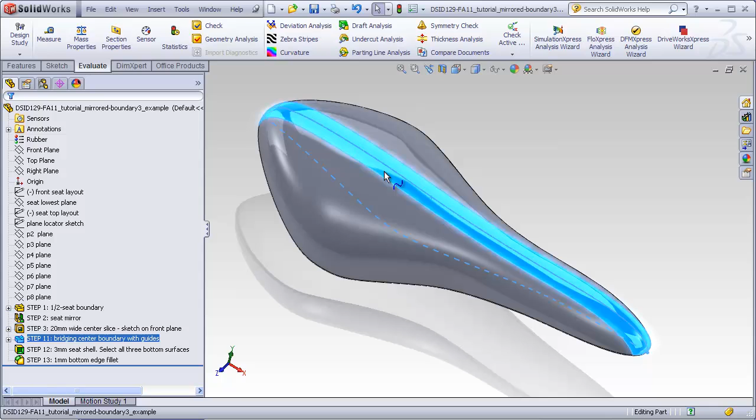In previous videos we learned how to make a symmetrical bicycle seat by making one half, mirroring it to the other side, cutting a slot out of the middle, and then making a boundary which bridges smoothly between the two. At this point it's probably occurred to you that this is a lot of work and that maybe the right solution is not to build one half of the seat when making the boundary, but make both halves of the seat at the same time.

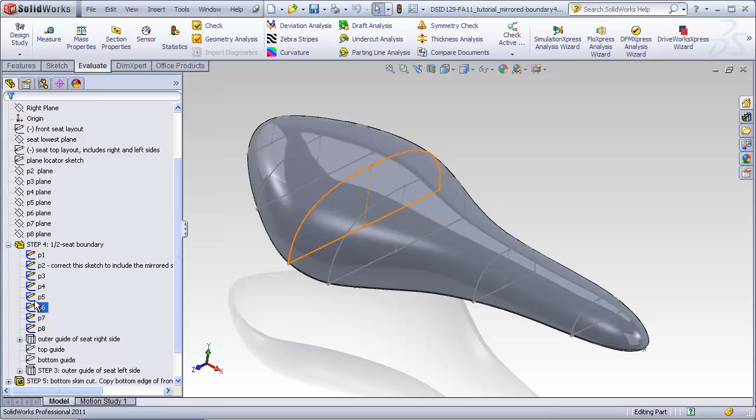So instead of having profile sketches that end right on the front plane and then are mirrored over after making the boundary, just have the profile sketches include both halves of the seat. And in fact we can do that, as you see here, and each profile includes both the left and right half of the seat, and this produces a nice seamless looking construction which is completely symmetrical and satisfies all of our needs. So why not just do it this way?

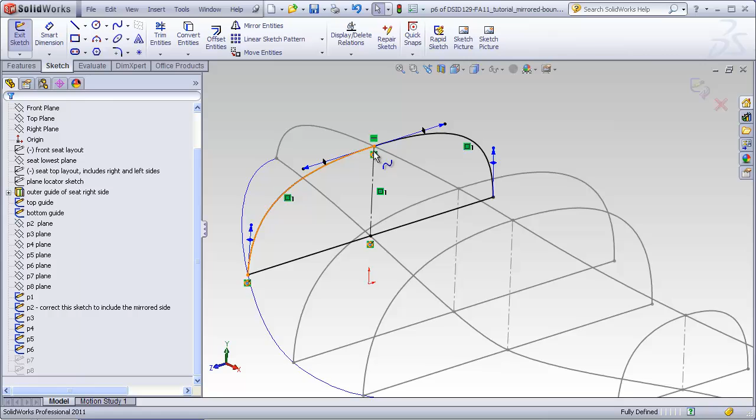So let's take a look at the starter file you've been given. Before you were given only one half of the profile in each sketch. Now you've been given both halves mirrored over on the front plane. And as always, whenever you're going to make something mirrored, you always have to make sure that any curves that meet the mirror plane do so at a perpendicular direction to the mirror plane. So here we see horizontal handles making them perpendicular to the vertical mirror plane.

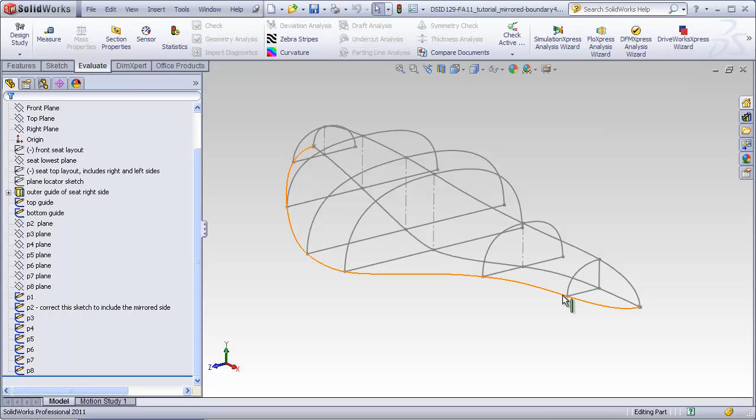Before you get started, one profile has intentionally been left as a half profile, so it will be your job to correct this to mirror over the other side, and I'll show you how to do that now. I'll edit this profile. All we have to do is take this vertical line, which is a solid line, change it to a construction line. Now just select all of our lines, mirror the entities, and that's going to mirror these lines about this construction line. That will complete that particular task.

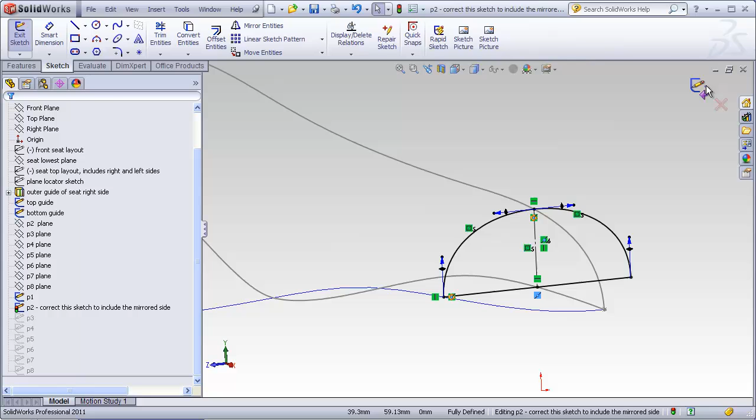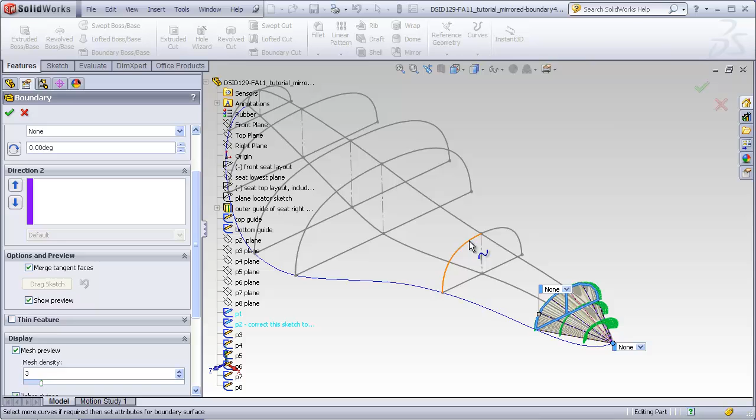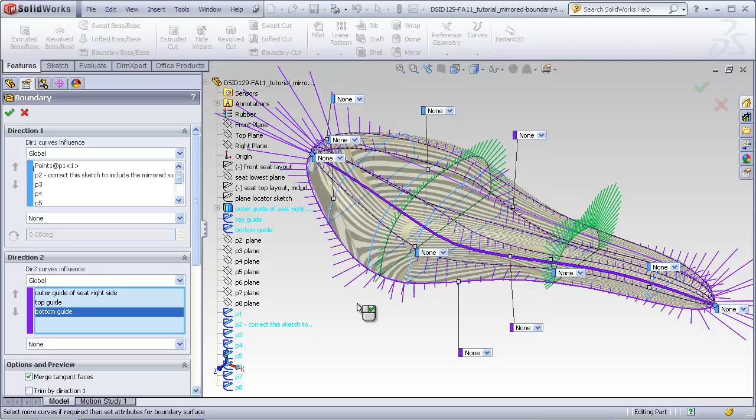Now we're ready to go ahead and make our boundary going from tail to tip, including both halves at the same time. So selecting the first section, P1, 2, 3, 4, 5, 6, 7, complete with P8. This was added into our direction 1, and then for direction 2 we'll include our outer guide curve, top guide, which has already been provided for you in the starter, and the bottom guide, which was also provided for you.

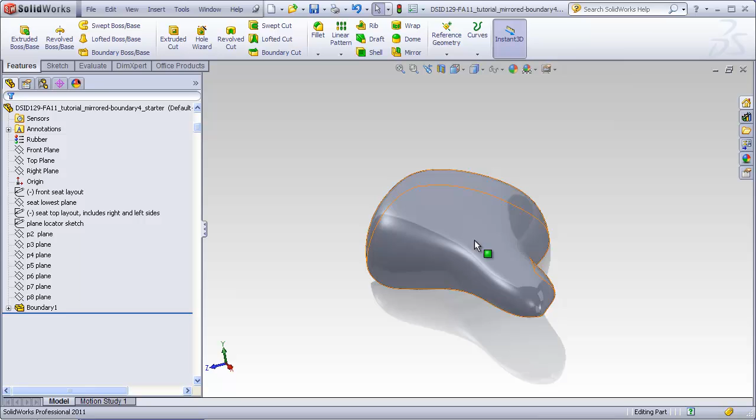Here's our completed seat. But we look at it from the top and we see that this half is not perfectly symmetrical with this half. Even though our profiles are symmetrical, we have nothing guiding this outer edge to manage the transition from one profile to the next on the left side of our seat. This of course suggests that what we need to have is another guide curve running on this side of the seat, which is a mirror image of our original guide curve.

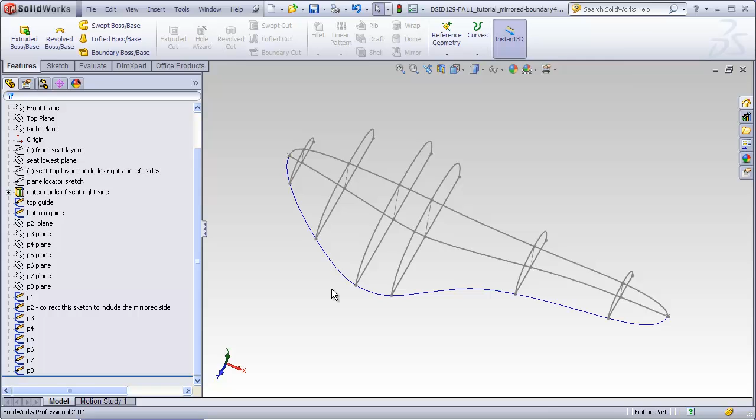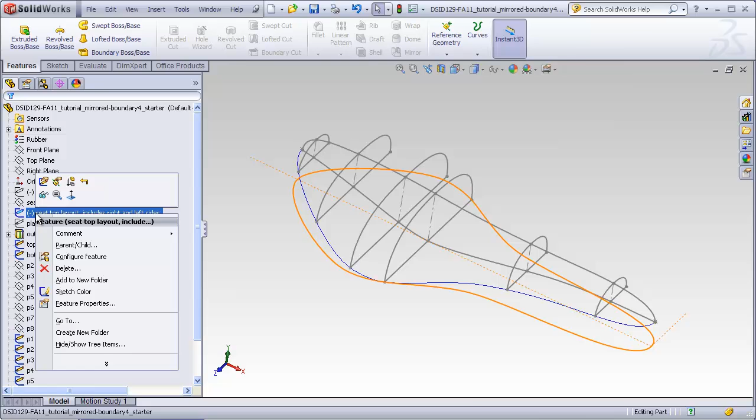The only problem is that this guide curve is a projected curve, and there's no way to make mirror images of projected curves. Instead, what we have to do is remake a new projected curve for this side using mirror images of the original sketches that were made to make this guide curve. The easiest way to do this is to go back to our top layout sketch and take this original curve and mirror it over to this side of the seat. This has already been done for you in the starter file. Now what we can do is use this curve when we make a new guide curve.

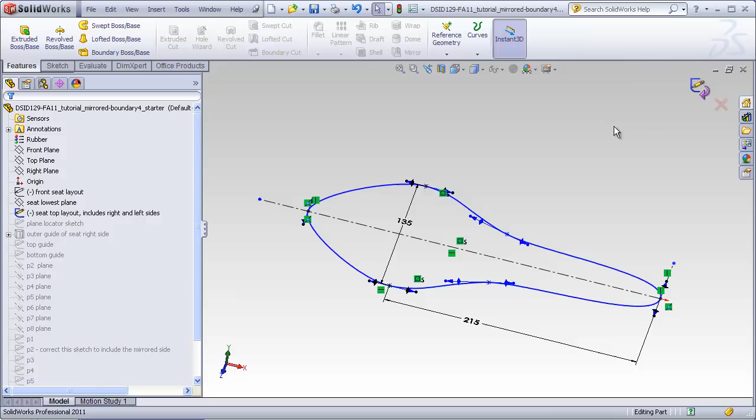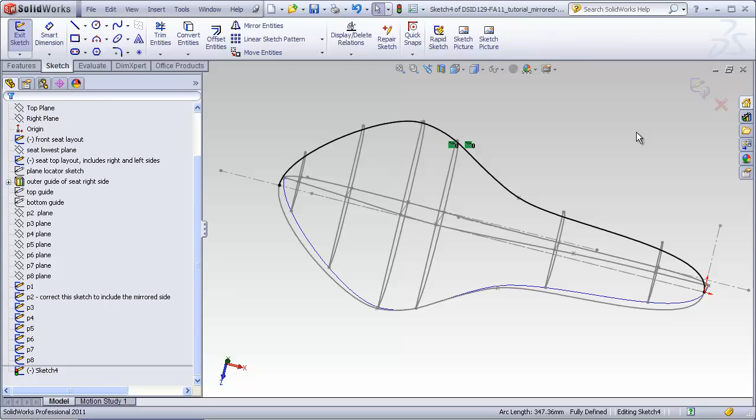To make the new guide curve, once again we're going to have to copy the appropriate elements from our layout sketches. On the top plane we'll start a new sketch and copy just this line from the top layout using convert entities and complete that sketch. On the front plane we'll start a new sketch and use convert entities to copy this line and finish the sketch.

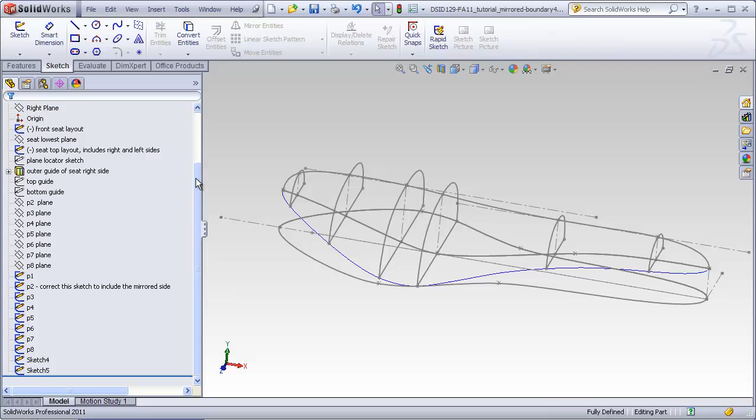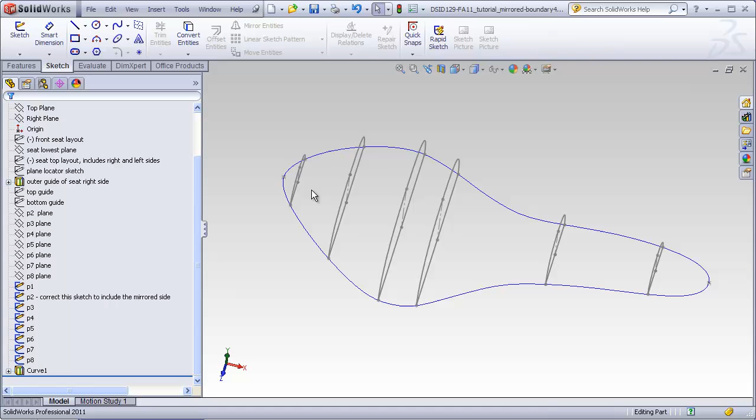Now, to be safe, I'm going to hide all my layouts so I don't accidentally pick them, so I can see just this copied sketch and this copied sketch, and using Insert, Curve, Projected, I'll project these two sketches together to create my brand new outer guide curve, which is a mirror of this guide curve. And I'm just going to re-show my top guide and my bottom guide, which are both located on the front plane.

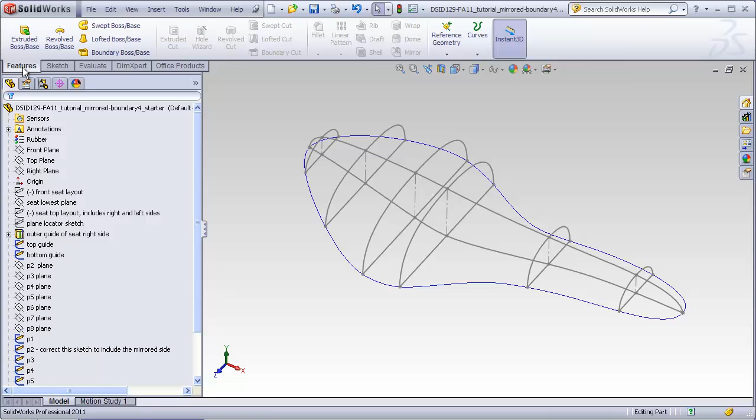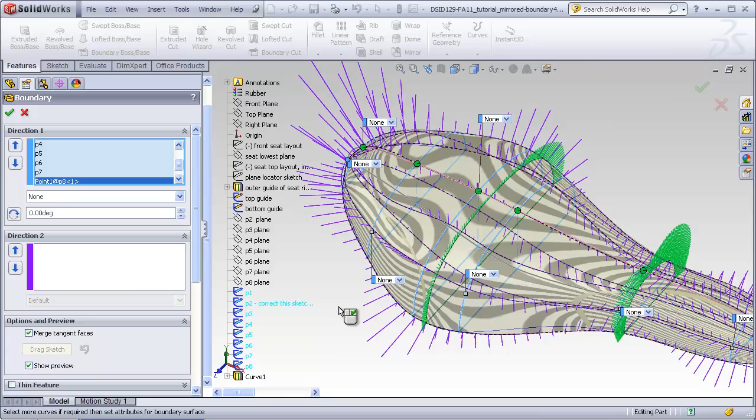Now I'm ready once again to go back and make my boundary. Starting with P1, 2, 3, 4, 5, 6, 7, and I'll select P8 from the feature tree because it's a single point, and then in direction 2 I'm going to select this outer guide curve, the top guide, the bottom guide, and this brand new guide that I created, which is a mirror image of this guide.

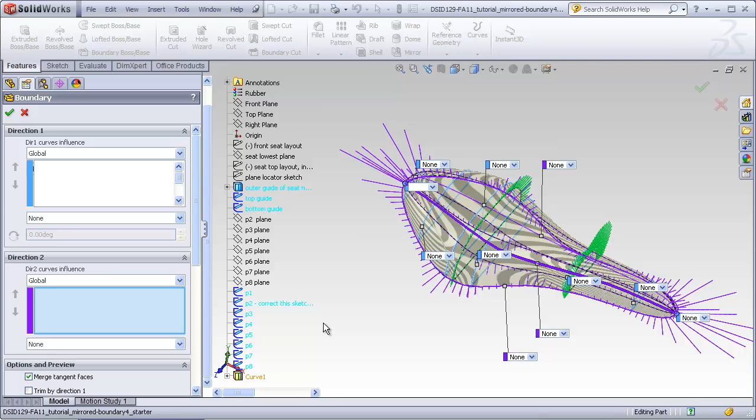That seemed like a little less work than the other method, and here we have a nice smooth looking boundary that represents a completely symmetrical looking seat. So why not just use this method after all?

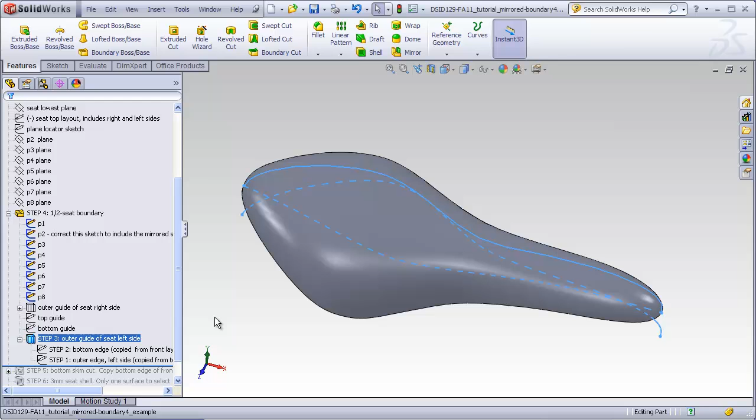Now let me pause for just a moment and go back to the completed example file. Just reiterate that the steps that you just created were step 1, which was copying this curve from the top view, this curve from the front view. Step 3 was to make a projected sketch of the two. Step 4 was finally to create the entire boundary.

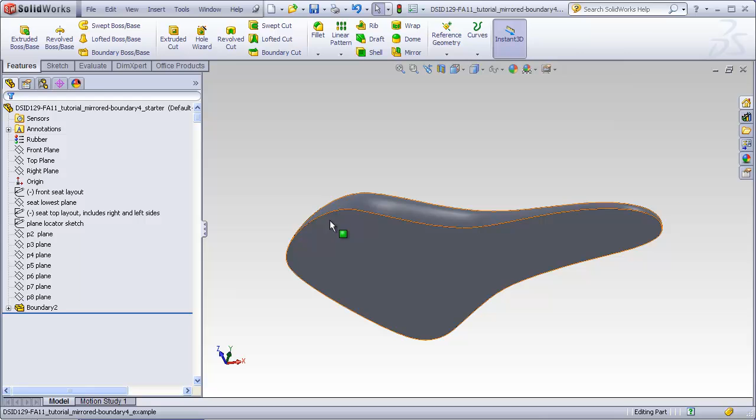Before doing any of that, you also had to correct the P2 profile sketch and make sure that this half was mirrored over to this half. Now, going back to the starter file that we were working on, the next step would be to simply shell this out. So we're going to select this bottom surface, shell, 3mm thickness.

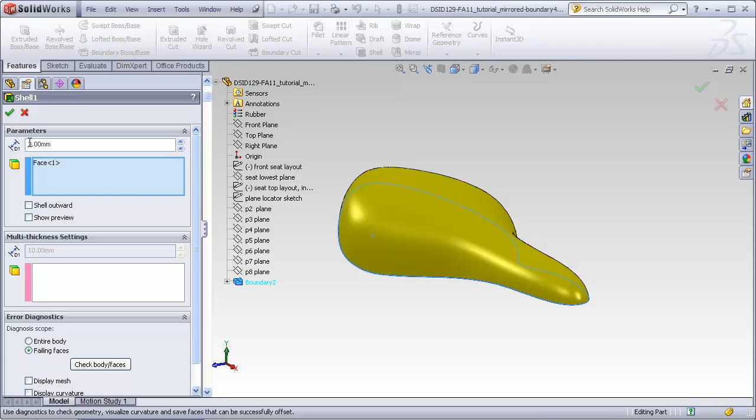Once again, like before, we have this warning about the minimum curvature of our shell. I'm not going to worry about that. And I see that the shell wants to fail. I could keep trying to make this thinner and thinner, but it's probably going to continue to fail. The reason for this has nothing to do with the thickness of the shell, but something that we got rid of using the other methods.

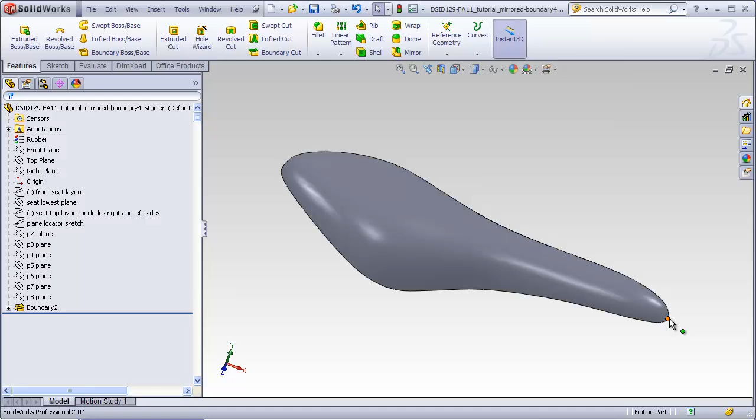The problem is this: when we created a boundary all in one piece like this, we started with a single point at this end and finished with a point at this end. So this is back to the problem of having a degenerate point at either end of our boundary. And when we have a degenerate point, what we can have are little ripples in the boundary that make it impossible to make a shell.

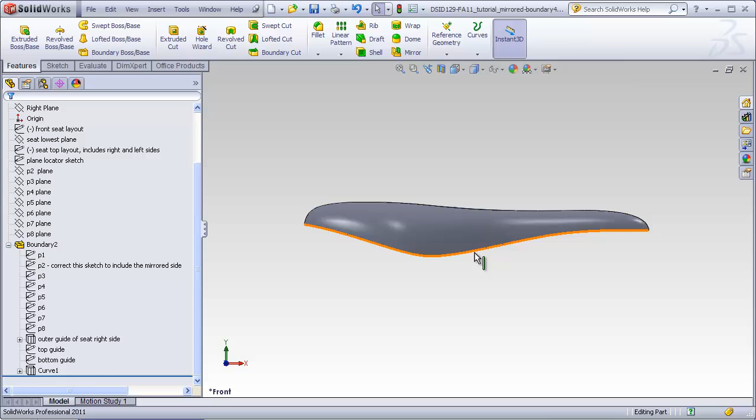To solve this problem, we are going to cheat just a little bit to get rid of that degenerate point. What we're going to do is skim a tiny bit of this bottom surface off, just enough to get rid of the area that is probably rippling at this end and this end, and see if that allows us to then make our shell. To do this, we'll make a new sketch on the front plane. I'll turn on my front layout. I'm going to copy just this bottom line, again using Convert Entities.

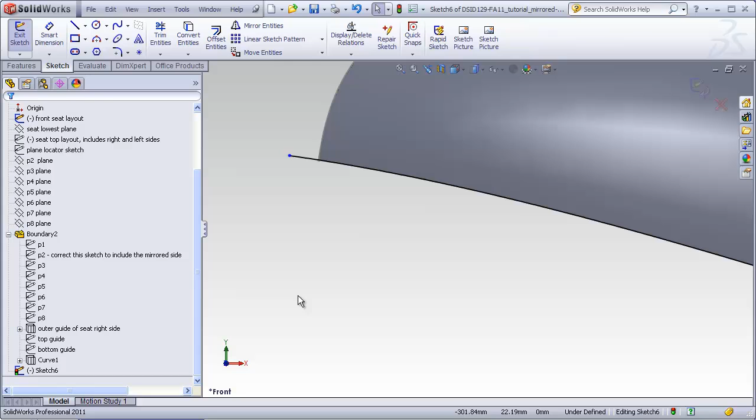I'm going to just arbitrarily stretch this out a little bit to make sure it's well beyond the ends of the seat at either end. And I'm going to use the Offset Entities command. Set this to about 1 millimeter. Reverse it so that this offsets upward.

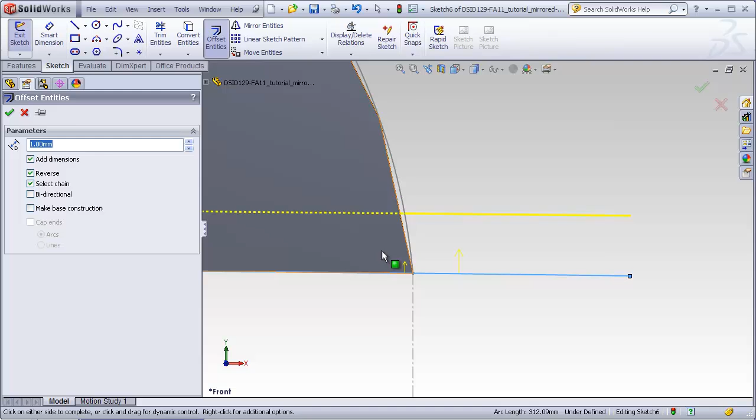And then what we're going to do is take this original line that was copied and change that to a construction line. We're going to use this line to slice off a little bit of the bottom of the seat. We've changed this to a construction line so that it is not used in the cut. Now 1 millimeter is too much, but I purposely set it to 1 millimeter so I could easily see the direction that the line was offsetting, whether it was offsetting downward or offsetting upward.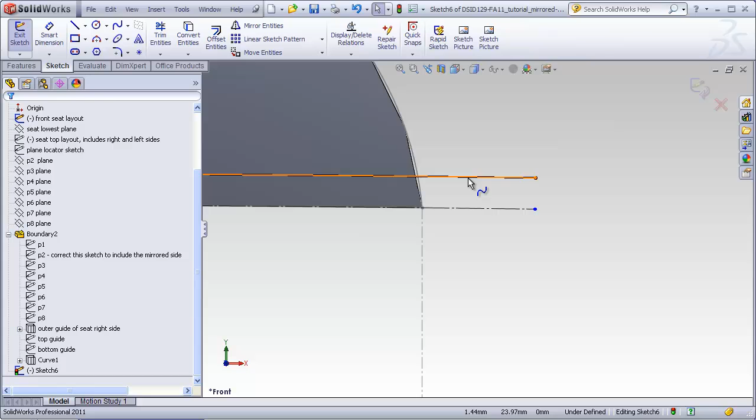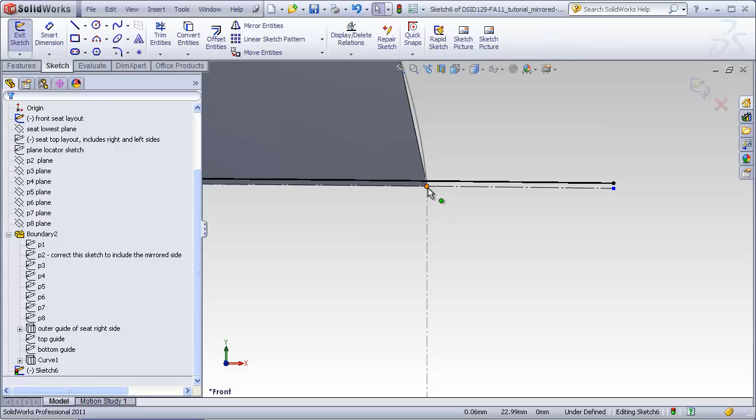Now that I've made my offset line, I'm going to go back and edit that dimension to something much smaller, more like 0.1 millimeters, which is about 4/1000ths of an inch. So if we look here again at a close-up, 4/1000ths of an inch is only taking a very tiny amount off of my seat and isn't going to affect the design very much.

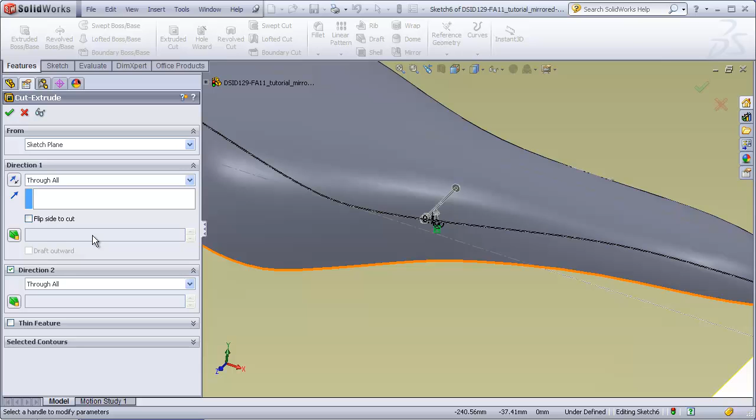Now I can do an extruded cut using through all in both directions. That will be the default because we just have a single line cutting, this cut command. We want to make sure that it's going to cut downwards. So we're going to say flip side to cut. This is going to shave a thin little bit, 0.1 millimeters, off the bottom of the seat. So it hardly looks any different.

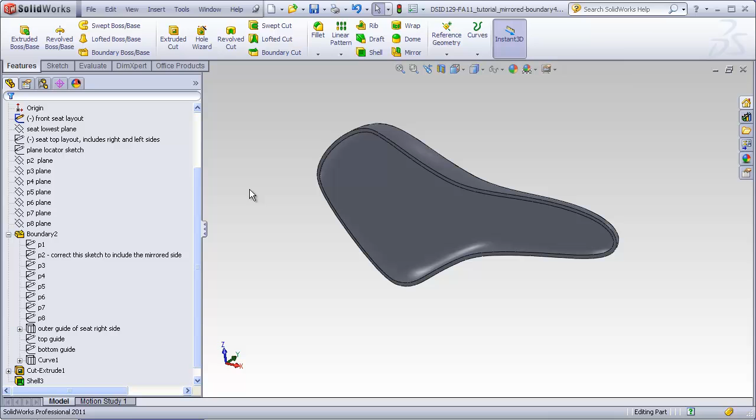Now we're going to try shelling this again, 3 millimeters, bottom surface. We see that it immediately is able to shell without a problem. And we can go ahead and add our fillet to the outside and the inside edge just like before.

So this seems like a pretty attractive method, and it's probably hard to understand why we weren't using this method to start with. Some of the problems that can arise from this, first of all, are the fact that we did have to shave the bottom off.

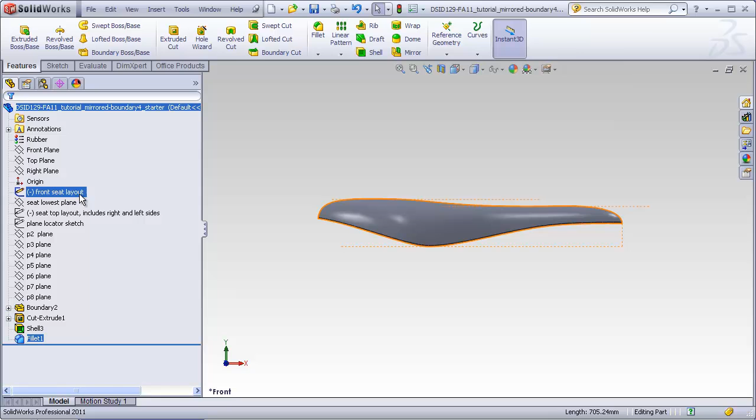That means we are changing our design intent just a little bit. We had a layout of a particular size, and then we're shaving 0.1 millimeter off of that layout. That's not much and probably won't affect your design, but in some extreme cases you might have to shave more off to get the shell to work.

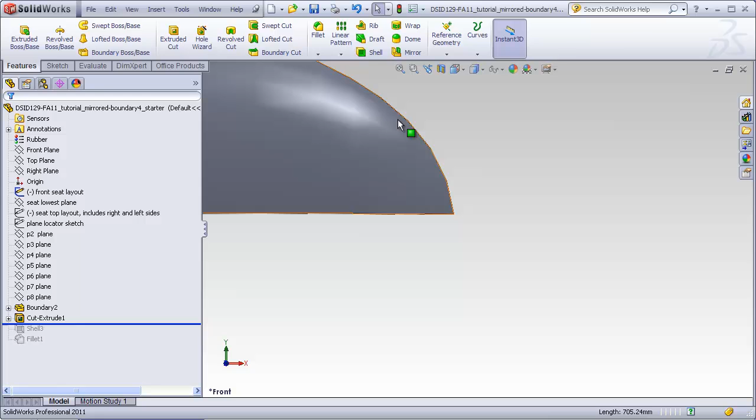When you shave the bottom of this off, we can see that not only are we moving the edge upward, but it also means that this point is going to move in this direction at the same time due to this curvature. So that means that this seat is getting slightly shorter as a result of cutting this bottom off. That means that under some circumstances you might want to compensate for that ahead of time in your layout sketch if you know that you're going to have to do that.

Now another reason that we might not want to use this technique is we cannot absolutely guarantee that this half of the boundary is exactly a mirror image of this half of the boundary. It will definitely be a mirror image at the places where profile curves occur. But the way Solidworks solves the surfacing in between profiles might be a little different on this side than on this side.

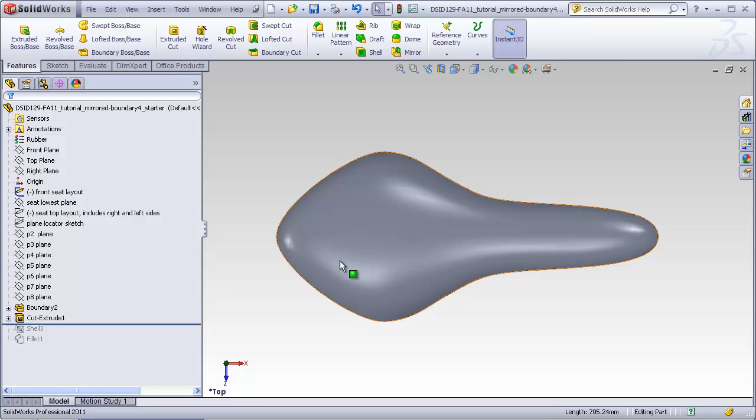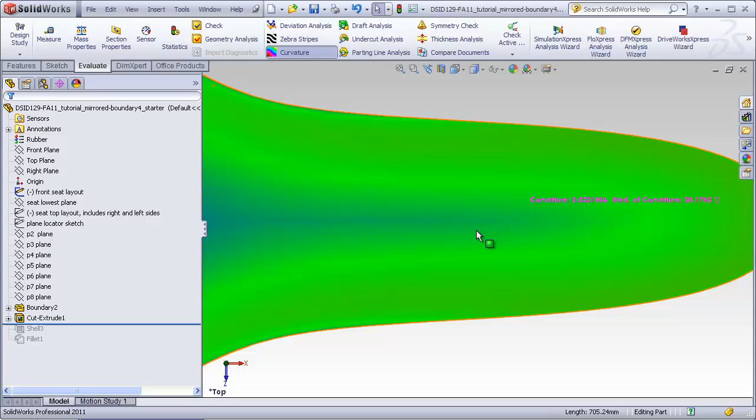If we turn on curvature, green means somewhat curved, blue means less curved, black means no curvature at all. We see that the shading looks fairly symmetrical on both sides. We do see a subtle difference in the shading here compared to this side, which means that in this area there is a subtle difference on this side of the seat compared to this side, but it's very small.

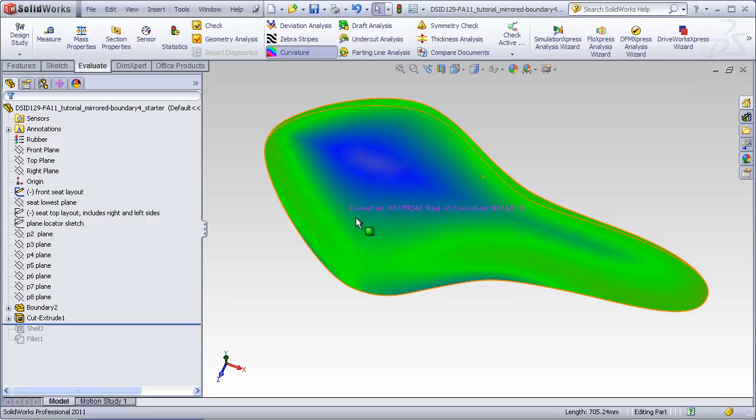However, in extreme cases, if we have a much more complicated shape, we could have cases where the way the boundary is solved over here is not the same way it's solved over here. This could give us problems down the road if we were going to create a feature on this side and then mirror it over to the other side, and maybe the way it interacts with this side will not be the same as the way it interacts with this side.

Another problem with this technique is that if we plan on adding a lot more features to this model that are also supposed to be mirrored over, it means that we have to mirror each and every one of those features over individually. So you can imagine on a complicated design, which might have another 50 features, we would either have to mirror each of those 50 over individually, or we would have to have a mirror command where we have to select each of those 50 features to carefully mirror them over.

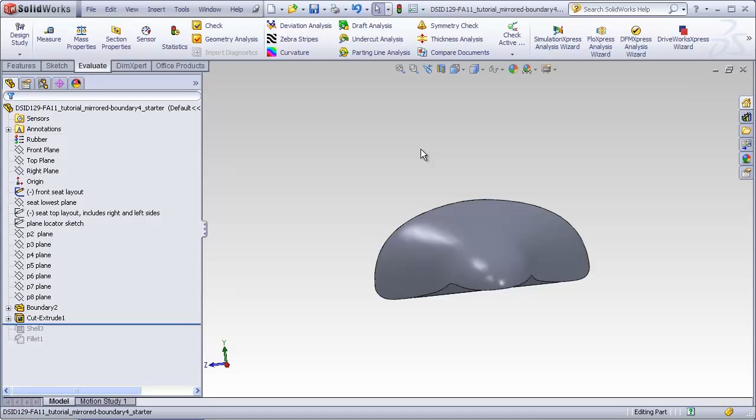This can be problematic, especially when you're trying to mirror things like fillets. It's often much easier if you know you're going to mirror a large number of items to do all of them in one half of the body and then mirror the entire body over in the end. This method is preventing us from doing that.

One sneaky trick to get around that, though, is to cut the seat in half again, delete this half, add all of our features onto this side, and then when we're all ready to go, just mirror the body over again. So for example, if I use the front plane to cut away this half, and then remirror this body over,

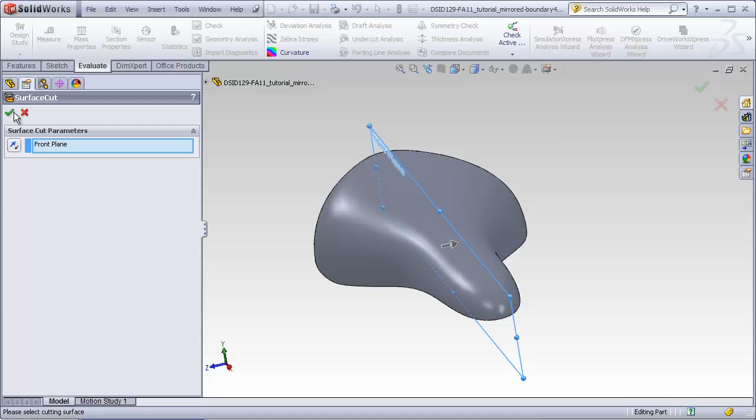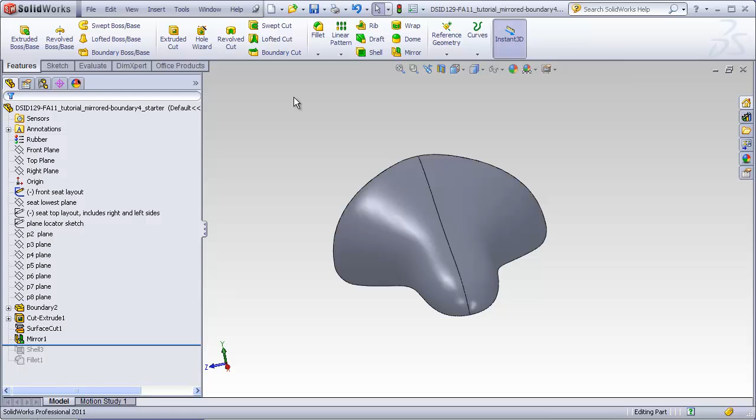Because of this technique we used to create this in the first place, this mirrored half should join up nicely with the original half, unlike with the other techniques we were using. So we go to the zebra stripes. You see that this blends together quite nicely on the join line. So that might be a little trick you can use.

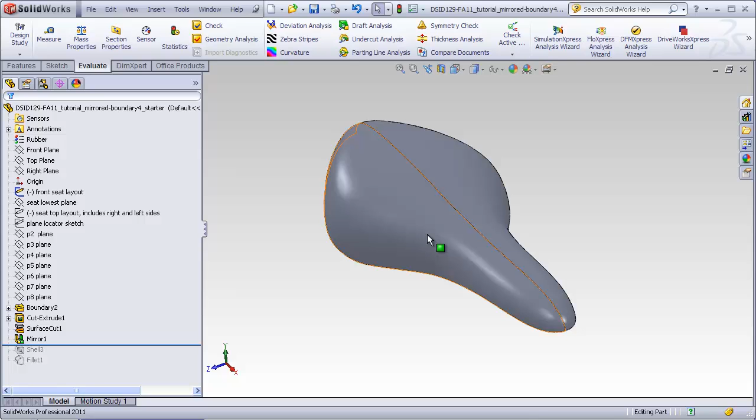We purposely build both halves at one time, cut away the second half, add all the features we need to add to this half, and then mirror the entire body over, which will include all the features that we created downstream. Just to recap the process for the tutorial,

Steps 1 and 2 were to copy the appropriate curves from the layout sketches. Step 3 was to project those two sketches together to create a new guide curve on the outside edge. Step 4 was to actually create the entire boundary.

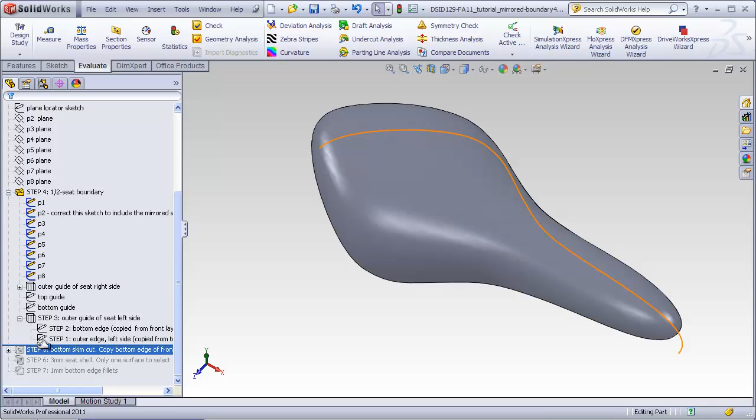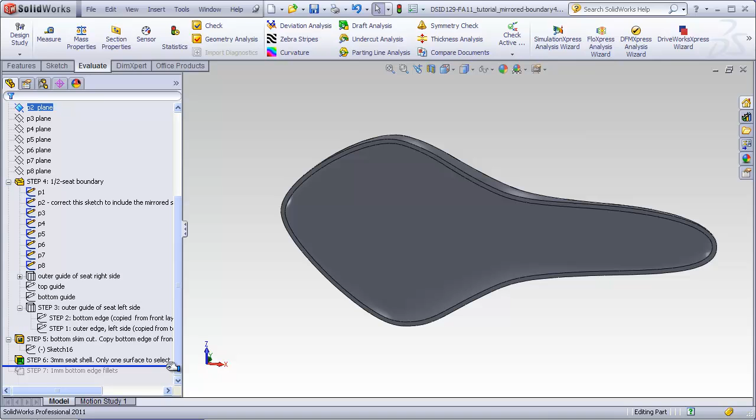Step 5 was to create a sketch that offset the bottom by 0.1 millimeters and use that sketch to skim off the bottom. Step 6 then was just to shell the entire boundary with a 3 millimeter thickness. Step 7 was to add the 1 millimeter fillets on the edges like before.